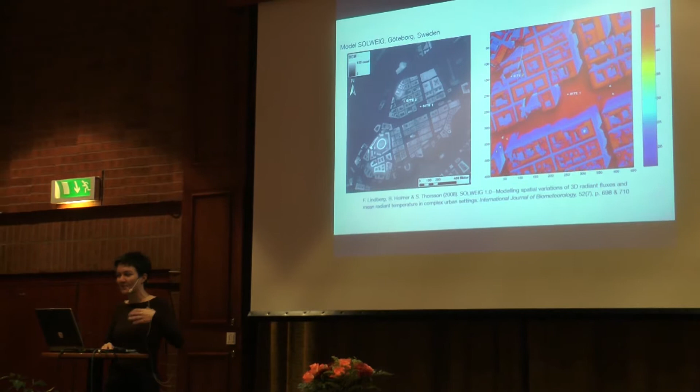So when I landed in Chicago in a similarly rather confined research environment, I felt at home, and I started to develop my dissertation topic. During the 2000s, there was a considerable amount of research coming which tried to address the issue of solar energy in a complex environment like cities. So I immediately jumped on it. This is something I want to do. So I worked on it.

There were three major universities working on it. Göteborg, which was more than just the climate aspects; Lausanne; and Cambridge, the Martin Center. So I looked at what they were doing, and I developed my own first, second, third proposal. I wanted to study how the built environment, different forms, influence the radiative environment between buildings. I presented it, and there were lots of comments and questions from my advisors.

But when it came down to whether they'd accept my proposal, it was like, 'Chilla, you are narrowing down too much on your topic. You're just concentrating on one single aspect, the radiative environment. You need to open up. There's much more to it. You need to look at the climate.' So I said, yes, of course, I will look at the climate.

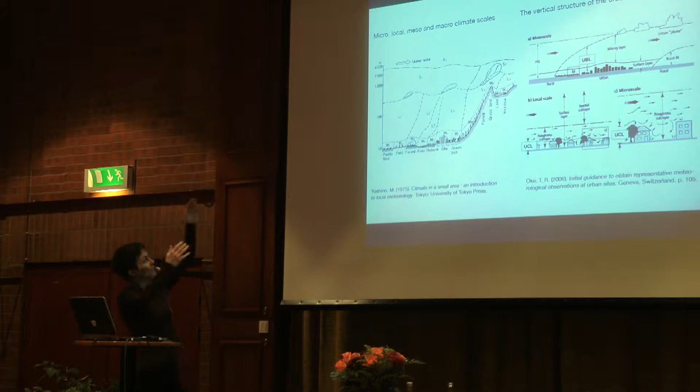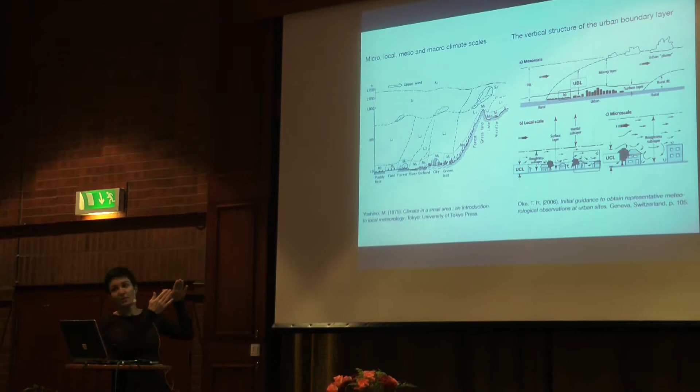When I first said yes, I didn't know what I was getting myself into, because apparently I needed to gain a basic understanding of atmospheric science and a working understanding of urban climatology. What I learned is that they divide the atmosphere into different scales, from the larger ones down to the micro and local scale, which is eventually the interest of architects, planners, and most engineers. I also learned that as you come from the larger scales toward the smaller scales, solar energy and surface conditions play even more pronounced roles in the conditions we find there.

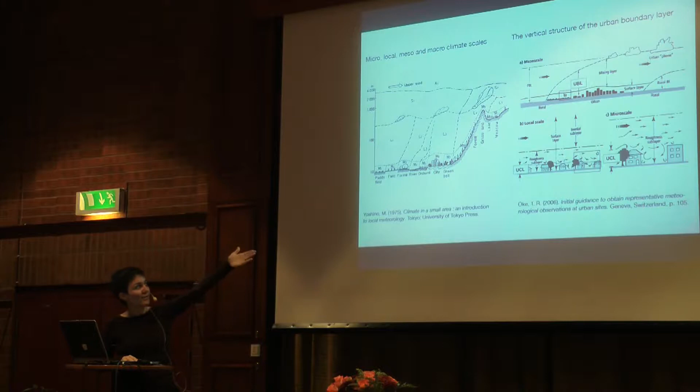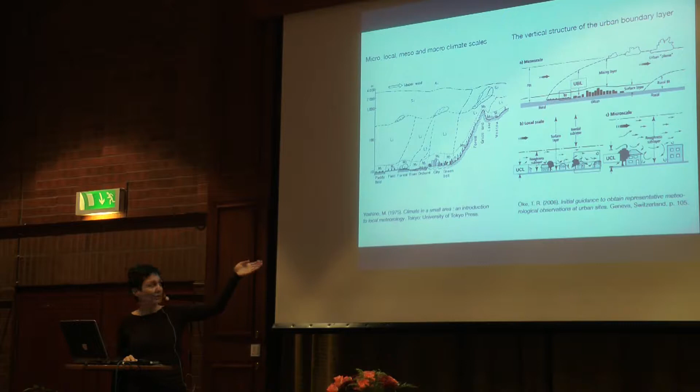So I included one part of how they are structured, but my topic dealt with the influence of urban form—in my case, urban block typologies—on the microclimate between buildings, which in climatology is termed the urban canopy layer. So then I needed to decide what measures I was going to apply.

Temperature came naturally. By digging through the literature and studying urban climatology and urban human comfort, one measure that came down to it, very important, was the mean radiant temperature, which is a theoretical measure. It's more like a concept, which unifies short and long wave radiation and its impact on the human body. So obviously that was my second choice of what I was going to be measuring.

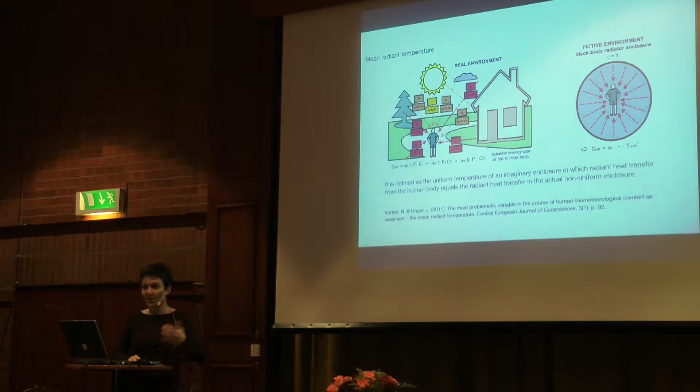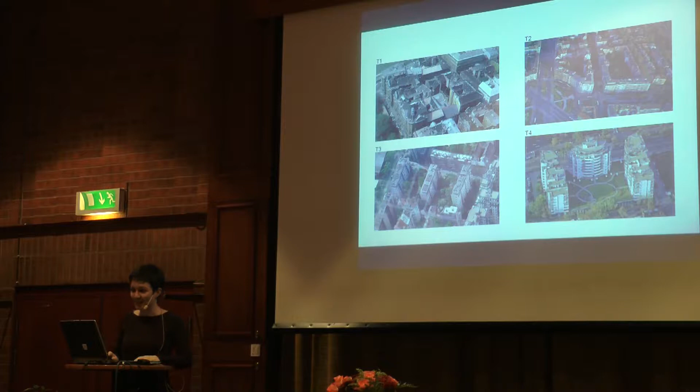And I chose my second hometown, Budapest, as a concrete form, which later could also be evaluated on site. As you might already suspect, the conclusions were, of course, that when it comes down to climate between buildings, the major component is the sun, and the form of the buildings. All other aspects I also studied just came second, so it was a bit of a circle that I ended up completing through my research.

So this is where I would like to finish, and I would like to thank all the professors and the school for this lasting experience. Thank you very much.

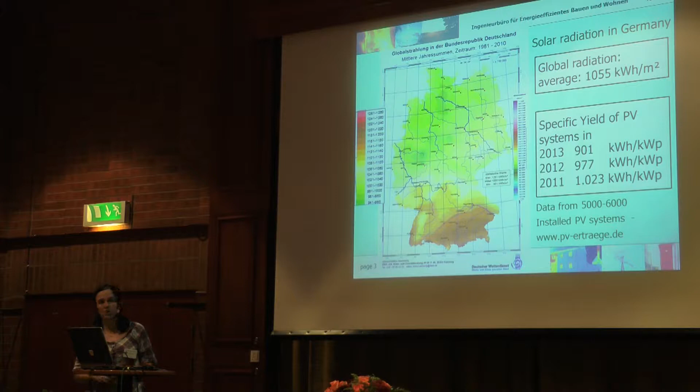I just want to talk a bit about solar energy in Germany, so you know what I'm talking about, and give you an idea of how much radiation we actually have and what the outcomes are. It's about 1,000 kilowatt hours per square meter, and depending on the weather, you get out between 900 and 1,000 kilowatt hours per kilowatt peak.

So it's not about feeding into the grid anymore, it's now something different. However, what really worked is that system prices went down quite a lot in the last years.

What we learned in our engineering office is that it's very important to really analyze the locations and actually go onto the roof to have a look. For instance, they had a solar thermal system nobody really knew about, so it would be hard to install PV systems there because something else was already in place.

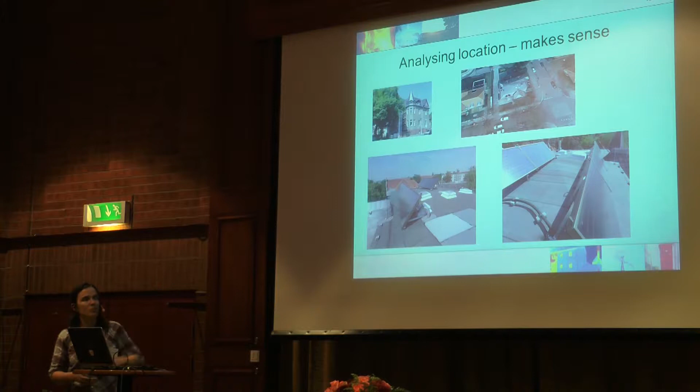It's just that users sometimes don't know what happens in their buildings. They had a solar thermal system but nobody knew about it, and they wanted a PV system although there wasn't much space. So when you have a building, you really have to look at what happens there, what is there.

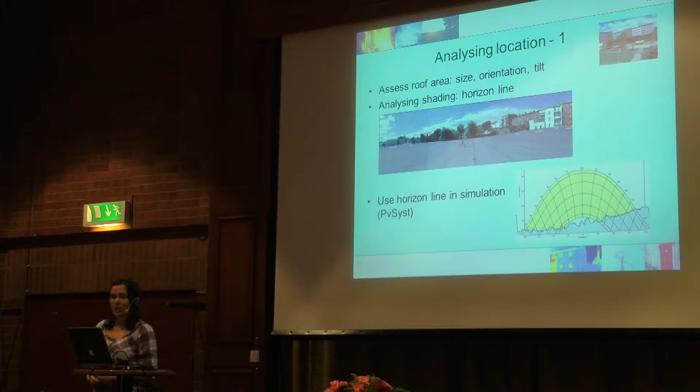What we did then, I think this was a good lesson I learned, was analyzing the location. So what we also did here in the ESES course, we had a look at the horizon. We took 360 degree photos, and then using the horizon line with PvSyst, as we also used in ESES, for analyzing how much output they would have.

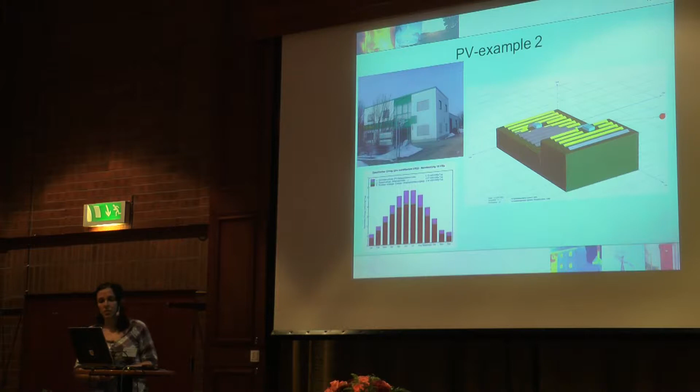What's also an issue in Germany, as here as well, is the whole shading problem. Whenever you look at PV systems, you have to analyze the whole roof area and any shading problems. Also, because of the change in feed-in tariffs, self-consumption is now much more important. It doesn't make sense to feed into the grid when you only get 12 cents, but pay 25 cents for electricity yourself. So the whole issue now goes more into storage and load management, and this is gaining importance.

What we learned is that you have to consider the entire building. It's not only about putting a PV system on the roof and that's it, but you have to know how much energy they need, and how much of the generated energy they can actually use.

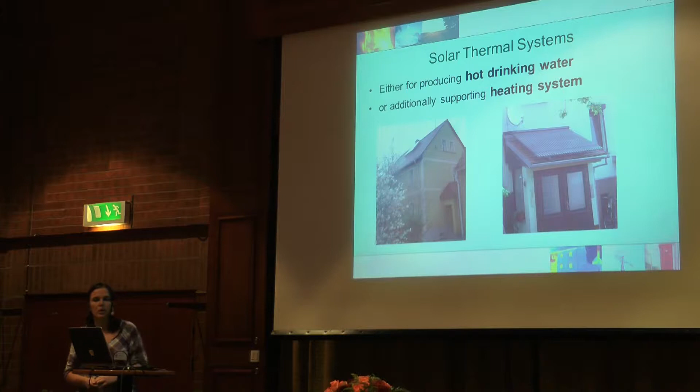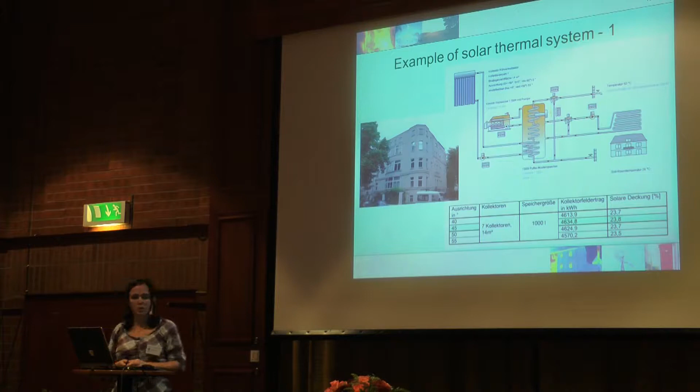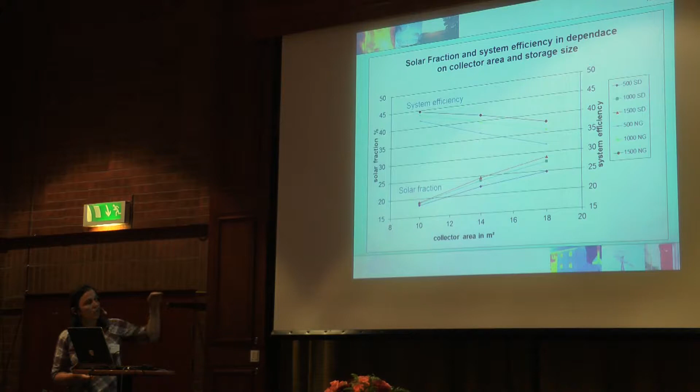Solar thermal is also used for domestic hot water, or for supporting the heating system, as we already talked about in Germany. This was also a project in Leipzig, an old house where the owner wanted to install a solar thermal system, and there we were optimizing what kind of system he could install, how big the storage has to be, and the influence of solar fraction on system efficiency, just as I also learned here in the ESES program.

Just the same, when you look at solar thermal systems in Germany, you also have to look at the entire building—how good is the insulation, what kind of heating system do they have, how many people live there, and how much hot water they actually use.

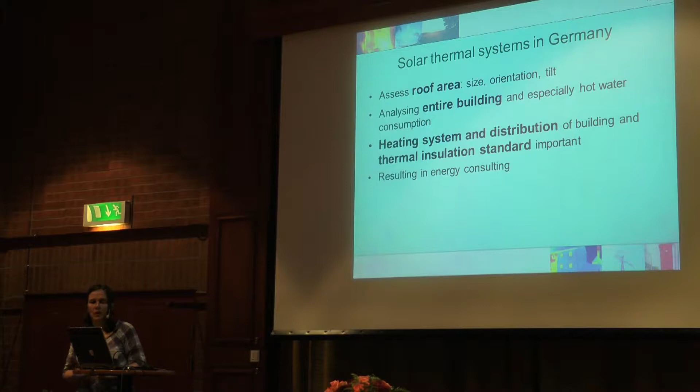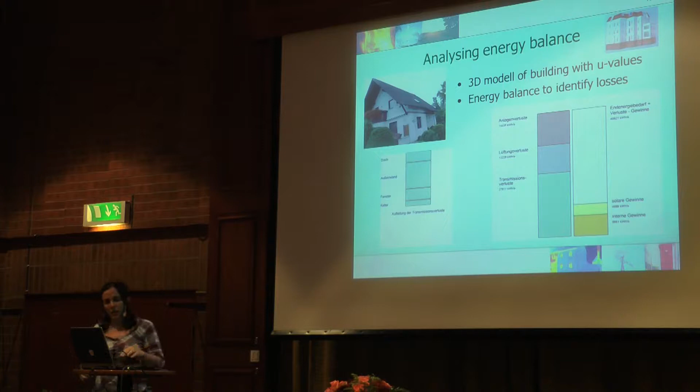That's why we came more to this whole issue of energy consulting. So now what we actually do is look at the buildings—whether it's just one person living there, or even houses with a lot of flats. What we do is first analyze how much energy they use, how much energy they lose, whether through the roof, outside walls, windows, or the cellar.

Then we give them ideas about what kind of redevelopment or renovation measures make sense—does it make sense to renew the heating system? First of all, we try to find solutions to save energy, and then we try to integrate solar systems or renewable energy systems, because that makes much more sense.

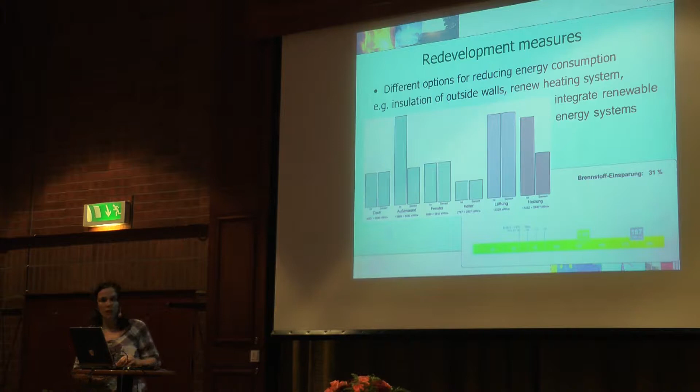But the problem is, even if you have a nice concept, it doesn't work if it just ends up on paper somewhere on a shelf. So we are more involved in quality control now, and supervise the construction, because a concept only works if it's really done the way you described.

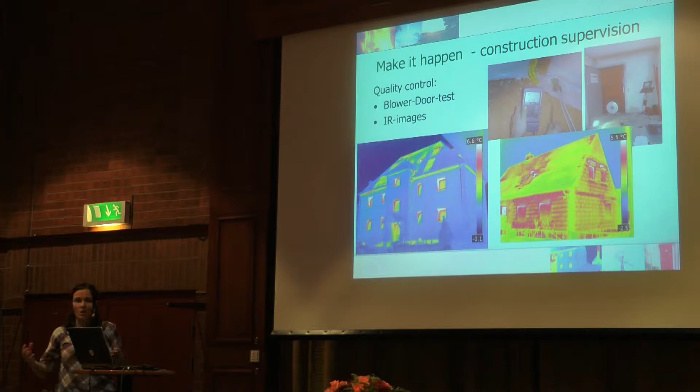Very often it happens that a plumber says, 'Oh, but I have the solar thermal package for a special price,' even though it doesn't make sense to have that kind of package. So we are also doing measurements—it's a blower door test, which you might know is about air tightness.

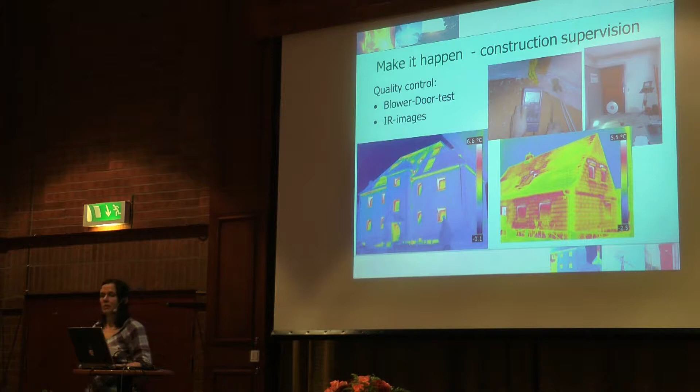These are infrared images. This is how a German house looks when it doesn't have any insulation—there are a lot of losses going on. This is how a house looks when the renovation doesn't work out correctly. As you can see on the roof, they had problems with air tightness, and mold came in, so now they have really big problems because the renovation was done the wrong way.

So we now have a much broader view of the entire buildings, looking more into building physics, ventilation, humidity, and mold problems.

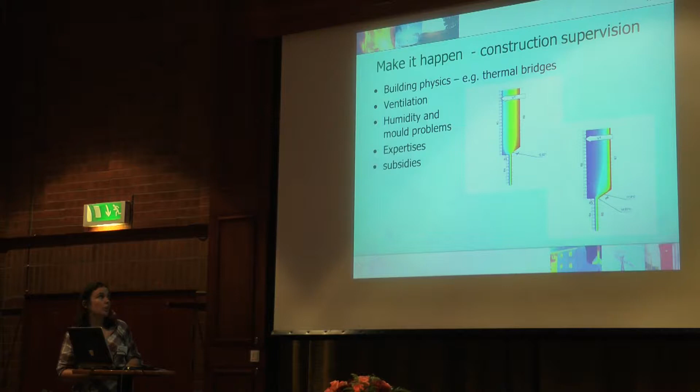We do expertises, and what's also a big issue is subsidies in Germany, because there are programs where people can get very low loans, about 1%, but they have to involve energy consulting experts. So in order to get the loans, they have to employ someone like us, and they also get back about half of the money that we actually cost. The German government tries to make sure that when renovation measures for energy efficiency are done, they are done correctly. So that's also quite good—you can even get half of the money back from the state.

So what we're actually doing now in our own engineering office is analyzing buildings, thoroughly identifying the losses, and proposing energy efficiency measures—like insulation, new heating systems, and renewable energy systems. We look at the entire building and its users, and provide custom-made solutions as an independent expert. We're not selling anything to people, but just try to convince them with our expert opinion about what makes sense to do. This you can see in one of the projects.

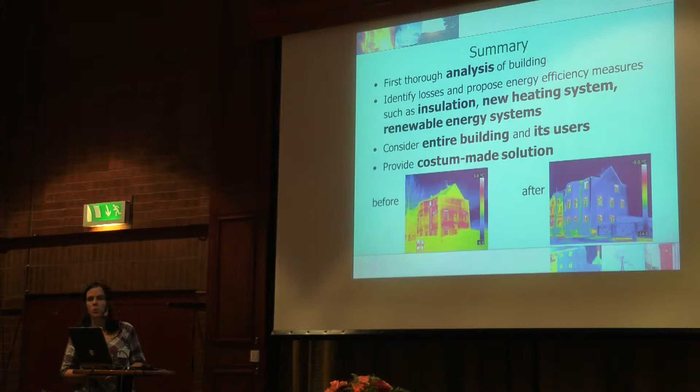This was before the renovation. They put insulation on the walls, and as you can see, the losses went quite down. That's it.

Well, sorry, one more thing. Okay.

Thank you. Okay, so that I found really interesting, because it mirrors a lot what we've been doing in our own group, starting on some kind of technology, but then going to a holistic approach of the whole building, because this is what is necessary now.

We now go on to Artemis Optikov, and he works at the company which is the most ESES dense company in the world, I would say. He's employee number 5 in the company who's gone through the ESES program. I think you're only 2 who are actually working there still. Yes. And there was another guy who came for an interview or these discussions with them a few weeks ago. So that could be number 6 coming sometime soon. So, welcome, Arthur. Thank you, Chris.

Dear all, my name is Artemis Optikov, and I studied in ESES in 2010-2011. And I'm very glad to be here today during this nice celebration of ESES and SERC University. So, during the presentation, I will talk mainly about my current work, but I want to tell a little bit about my educational background and working experience after graduation from ESES. So I studied in Ukraine in Dnipropetrovsk National University, where I got a bachelor and master degree in renewable energy engineering, and it was quite a good start point to study in ESES.

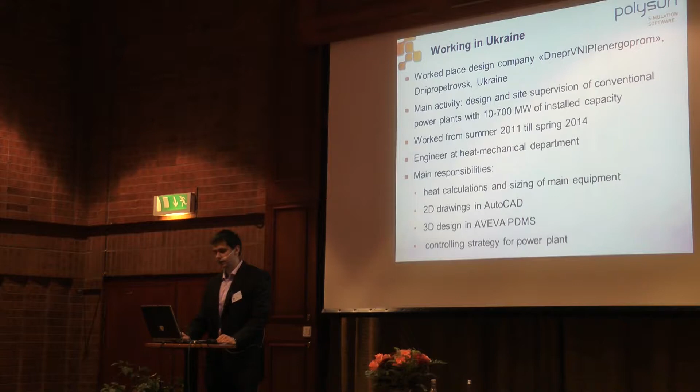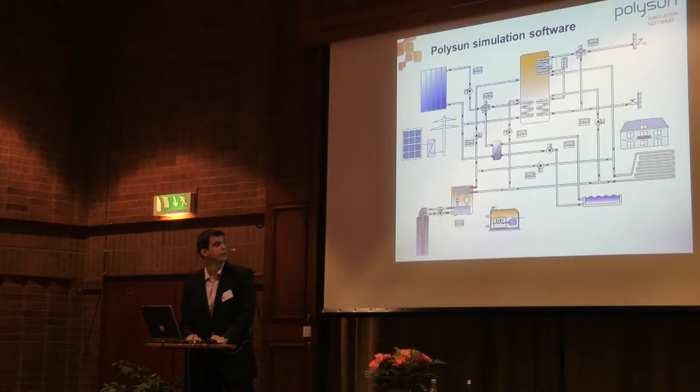I want to mention some main features and advantages of the software. So Polysun allows to simulate different components in the scope of one system. It means that both electrical and heat part can be simulated in one system. And the plug flow algorithm and variable simulation time steps allow precise simulation of systems with dynamical behavior. It's also a very user-friendly tool. It was translated into more than 10 languages, and it has a wide manufacturer database from all over the world.

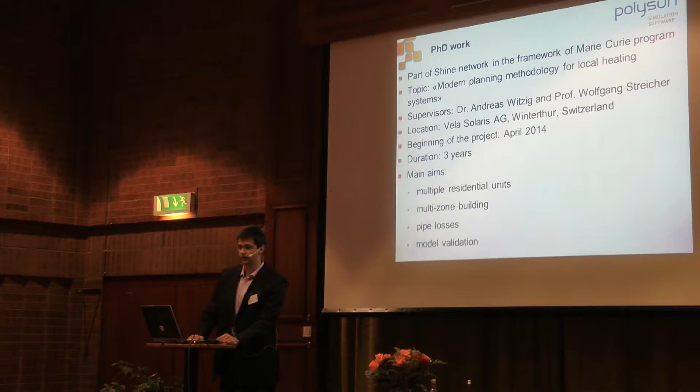I'm doing my PhD work there. My work is a part of the Shine network, which is paid by the European Union. And the main aim of my work is to extend Polysun to allow simulation of decentralized solar district heating systems. The main sub-aims are to extend the building model to cover simulation of multiple residential units in scope of one system. Also I need to develop a new model for multi-thermal zone buildings. And at the end, I want to work also with the pipe losses model.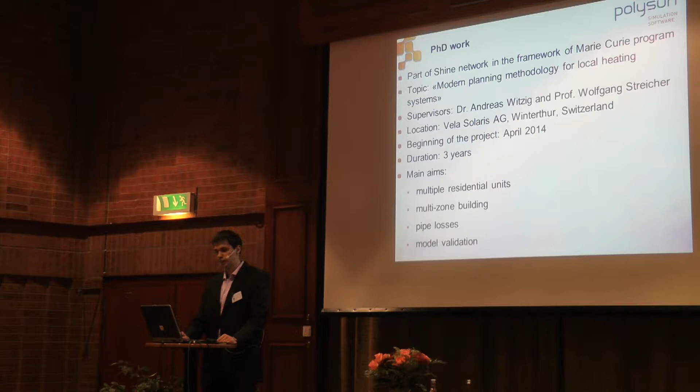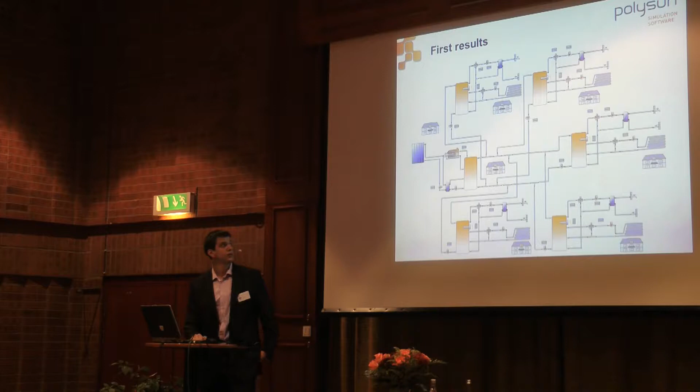My project duration is 3 years, and I've worked there for half a year already and achieved first results. So it's already possible to simulate in Polysun several buildings for the centralized heating system. You can see on the screen such a system example. So that's all about my work. And in the end, I want to congratulate SERC and ESES on this double anniversary. And I want to wish you a lot of good students and fruitful research. Thank you for your attention.

Yeah, thank you very much, Artem. So, as I said before, one of the joys of working on teaching in this program is to see people, but it's always nice if you can meet them again. So Artem is also working in the same project that I'm working in, so it's actually really nice to meet up with him again. So this is a big benefit as I see it. So next up, also from Ukraine, Hanna, please go ahead.

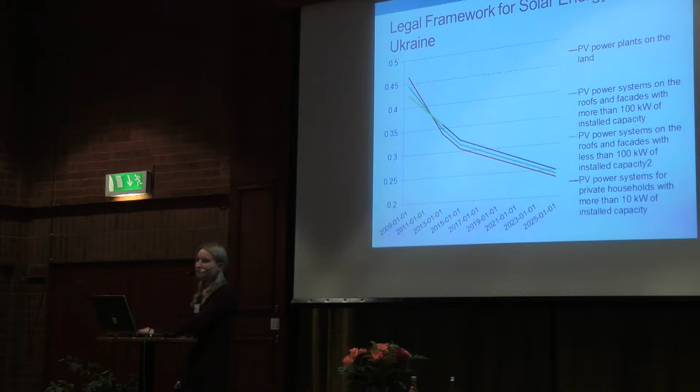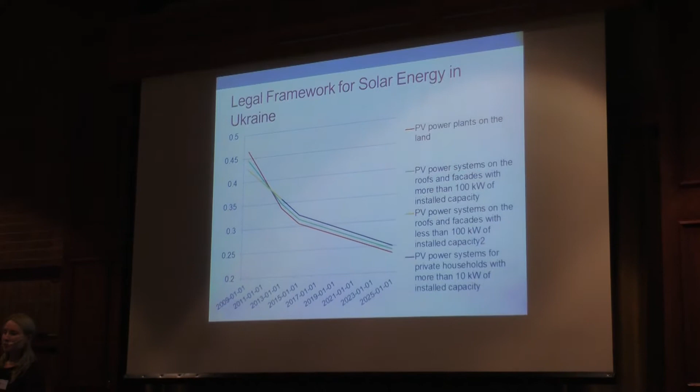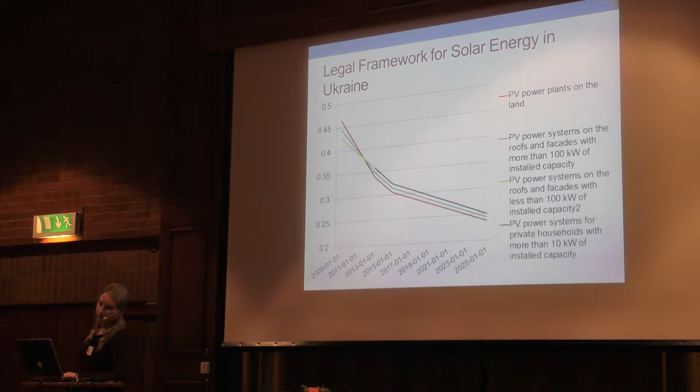So when I came back from Sweden, it was a solar boom in Ukraine because a really high feed-in tariff, which was called the green tariff in Ukraine, was introduced. It was set at 46 euro cents per kilowatt hour, and it was 10 times more than the average price of electricity for households. And this green tariff is subject to decrease over time, and it is granted until 1st January 2030. So now it's about 34 euro cents per kilowatt hour, and from January 2025 it will be 24.

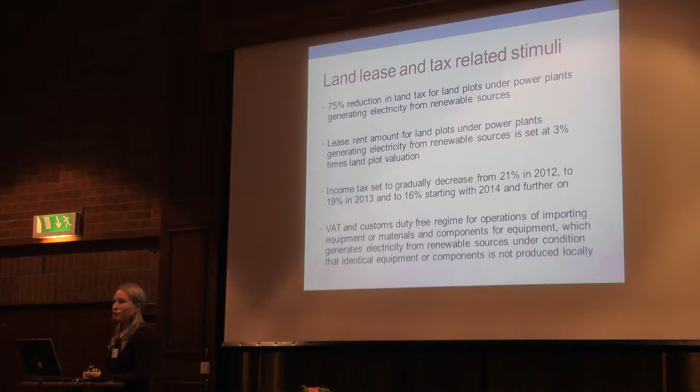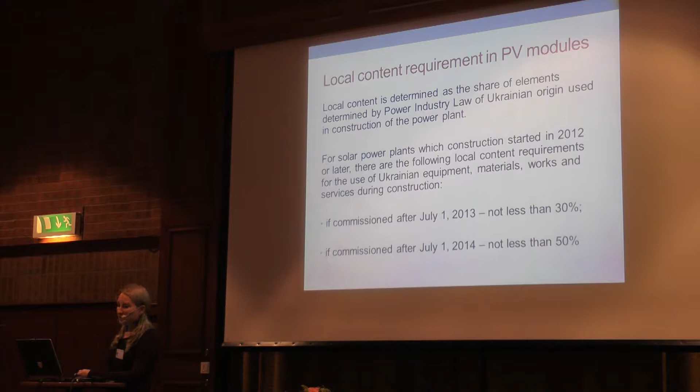So also in 2010, 2011 some land lease and tax-related stimuli were introduced, which really helped companies to build PV power plants in Ukraine. And now we have about 600 megawatts of installed PV power plants. However, in 2012, a local content requirement was introduced by the Ukrainian parliament, and the local content requirement is now 50%, which is very difficult to meet. That's why the solar energy market is not developing at the moment. It's one of the reasons.

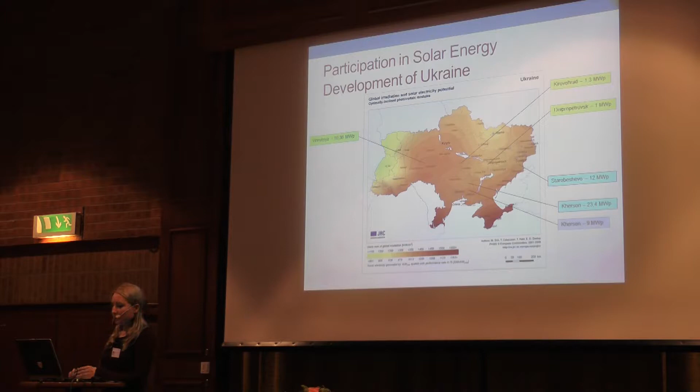So at the moment, the main goals of the energy sector of Ukraine are to introduce changes and increase efficiency, and also to decrease dependency on Russian fuels, of course, and increase energy independence and energy safety of Ukraine. And Ukraine has to encourage the transition from gas to alternative fuel types, and also increase energy efficiency and further develop the renewable energy sector of Ukraine.

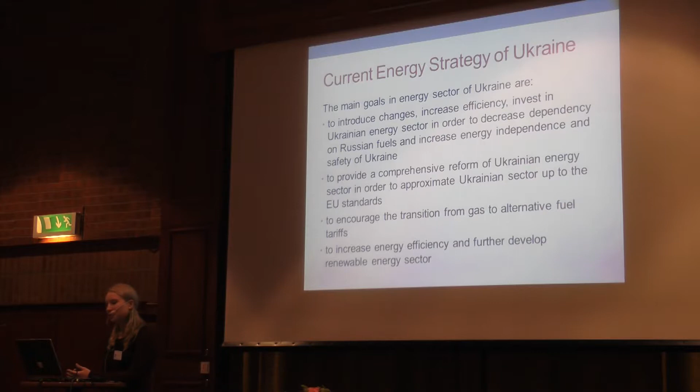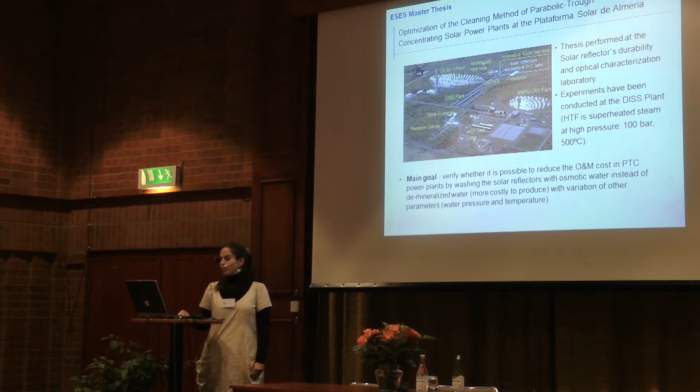I don't know if you're familiar with this, but this is Almería in the southeast of Spain. This is the Tabernas Desert, and many Western films were shot there. Clint Eastwood, love it, and everything. But apart from that, there is one famous research center there, the largest in Europe, and I performed my thesis in the laboratory of optical characterization and decay of solar reflectors. You can see the sign over there. It's a very, very large center.

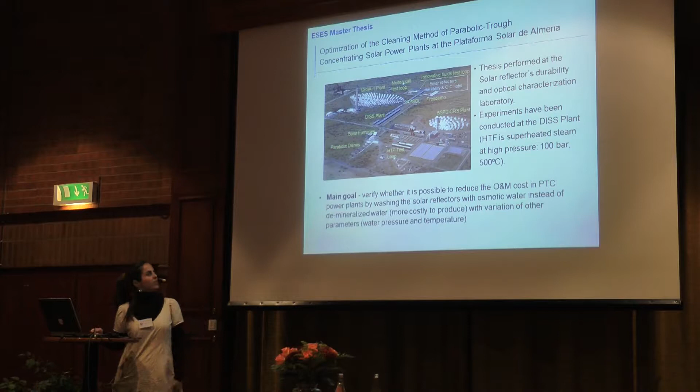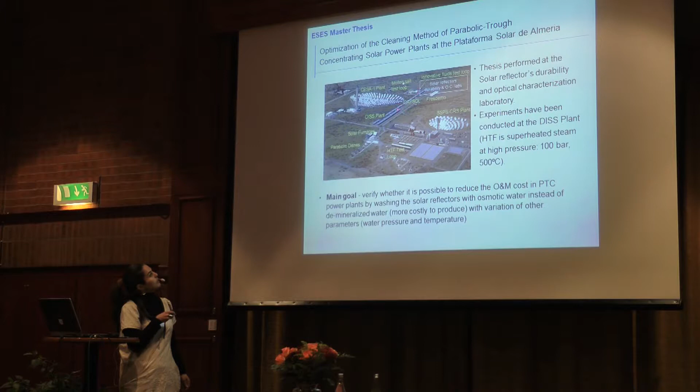So my thesis was about how to optimize the cleaning methods in order to reduce cost. Basically, normally in CSP plants the mirrors are washed with demineralized water, and we wanted to demonstrate that with lower quality water we could reach good optical performance as well. So yeah, the experiments were developed in this loop here, and yeah, here we are.

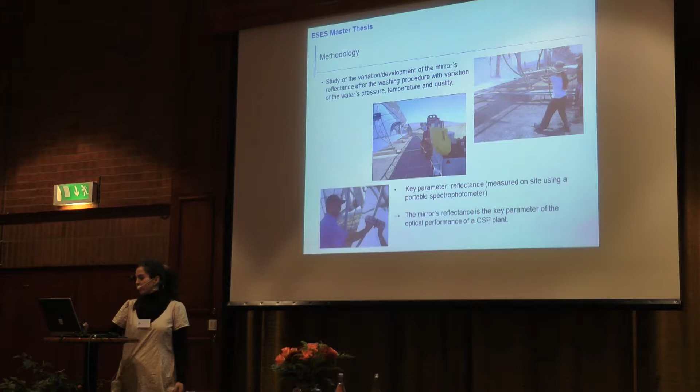We have here some pictures about the thesis, when I took the experiments, and basically it's based on how the reflectance was varying depending on the type of water, the quality of water we were washing with, in combination with other parameters like pressure or temperature. And finally, we had good results. We could reach good reflectance values, and in combination with a bit more temperature, we could reach very close values compared to washing with demineralized water, which was much more costly.

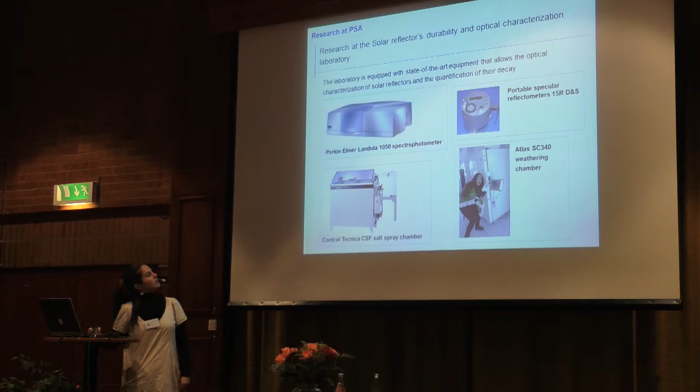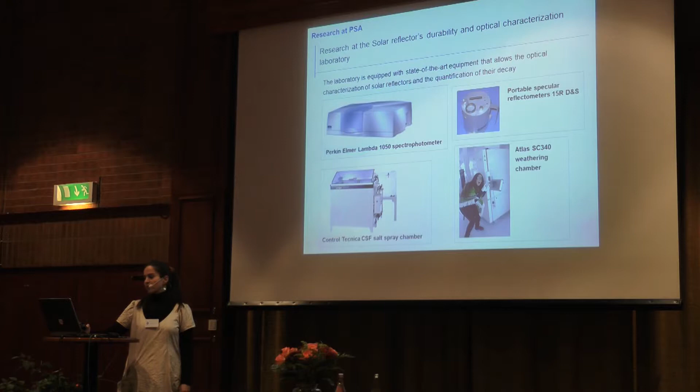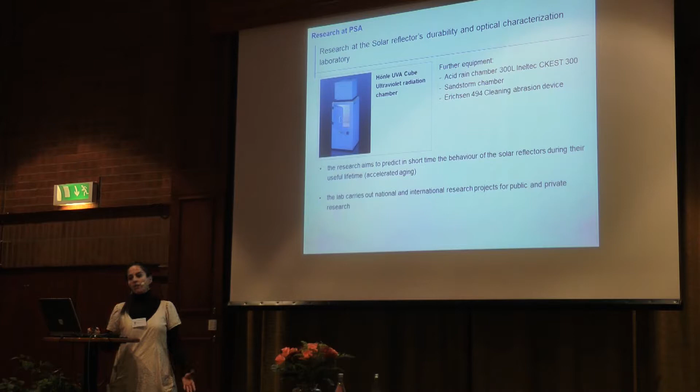After that, I got a job there, and I had a great time there, and I continue working in this laboratory. And these are a few pictures of the instruments we were using there. Spectrophotometers, portable reflectometers, so we could take measurements on site, chambers to simulate salt-sprayed atmospheres, weathering chambers to simulate several weathering conditions that would destroy the mirrors. And the main activity of the laboratory is to study how the mirrors decay during weathering conditions, and how will be the real lifetime.

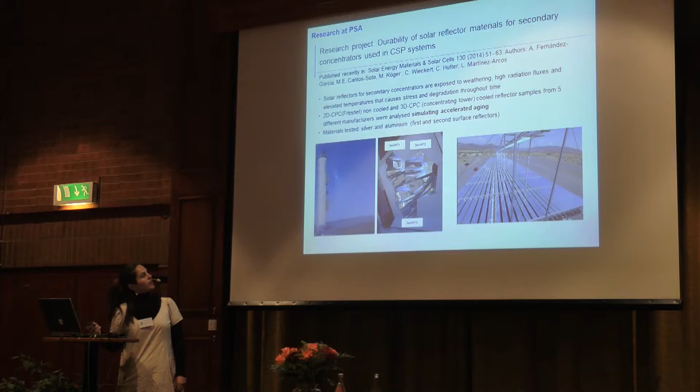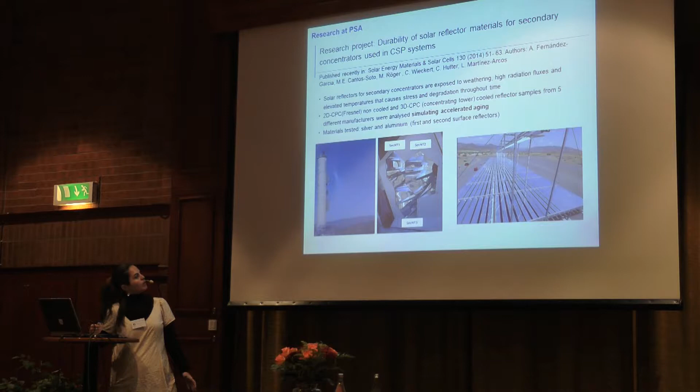Recently we launched a publication. It's not really fresh for me, but by that time, that was 2 years ago, we did a study with secondary concentrators for Fresnel and for concentrating towers. And we took samples, and we performed several tests in laboratory, and there are a few tests here. We put them in salt spray chambers.

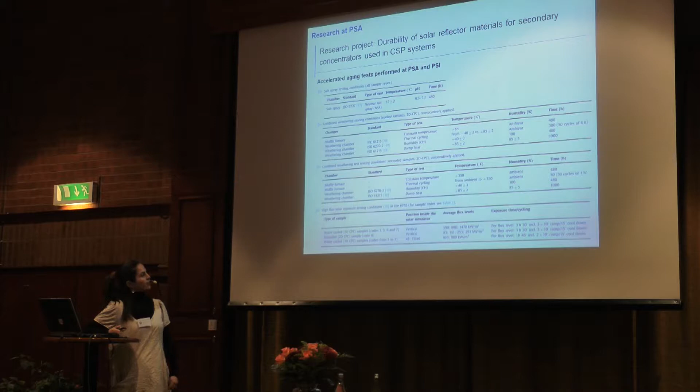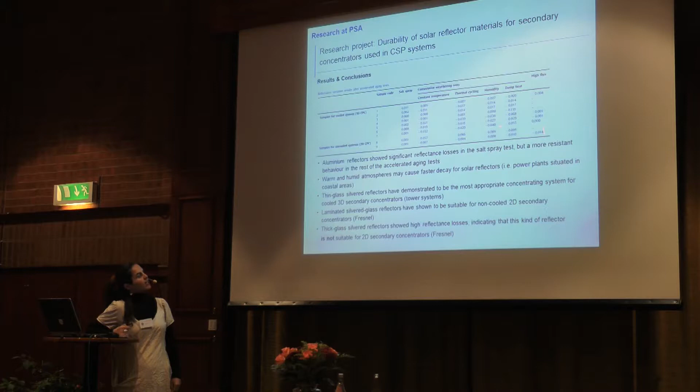We had also a muffle furnace, so we could put them at constant temperature, and thermal cyclings to simulate day and night, and how the mirrors would get decayed depending on this change of temperatures. And we performed also some experiments in a solar simulator in Paul Scherrer Institute in Switzerland, and then we compared several materials. And we obtained some results, maybe it's too long to explain, but the conclusion is that with damp heat simulation, we got the highest reflectance losses, basically.

And after this period in Plataforma Solar de Almería, I left Spain and I went to Iceland to work in an eco-village. Because since I was here in Sweden, I love northern countries. And I work in a sustainable community, very peculiar, where there are about 100 inhabitants, and 50% of them are disabled people who work and live there. The philosophy is based on reverse integration, which is the society adapts to the people with special needs instead of the other way around. It's a small village that incorporates greenhouses, organic bakery, coffee shops, art workshops, so people can live and work there. Each inhabitant is working in one of these institutions of Sólheimar.

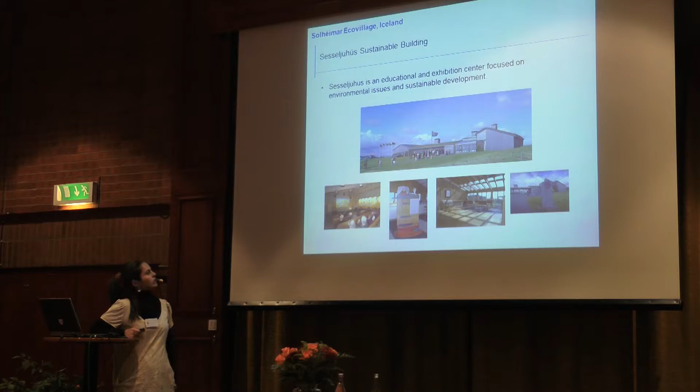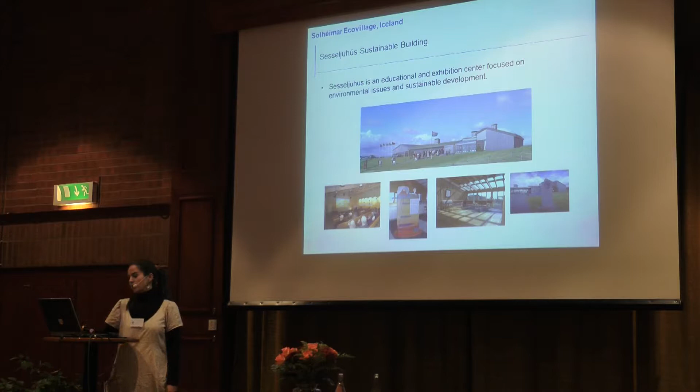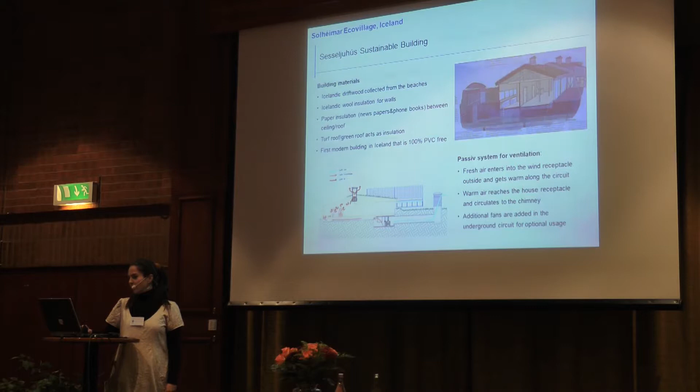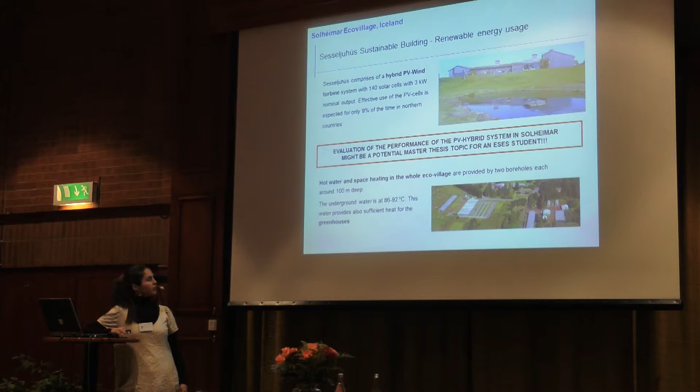And the last year I was working in the greenhouses, which means this summer, because there are 2 wells in Sólheimar which provide hot water and district heating for the entire village, just 100 meters deep, and we get water at 86 and 92 degrees, and this is enough to supply hot water to create high temperatures in the greenhouses.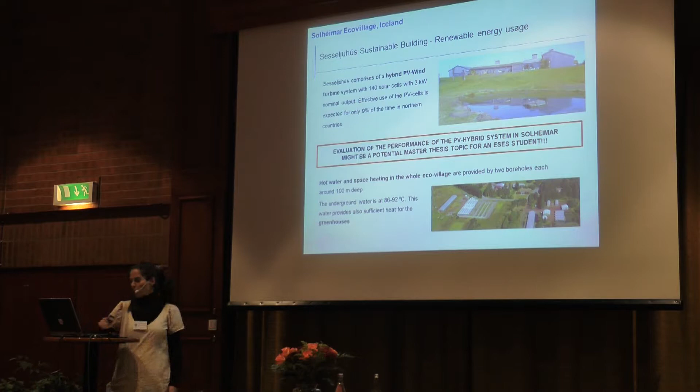What I did last year is that I designed a project to dry tomatoes. It was fantastic because nobody was drying anything there, and they had energy and they were not using it for drying food and storing food. So this is Reine Pétur again showing a tomato, fantastic. And this is the first prototype, the first design I did for the GO-DRY project. It was kind of optimized, and this is reality.

So that was the result, but at least we could build something, a chamber, and last year was the first experimental drying there, and this year we could improve the chamber a bit more, and we could reach temperatures enough to dry tomatoes, because tomatoes need between 48 and 50 degrees to get dry.

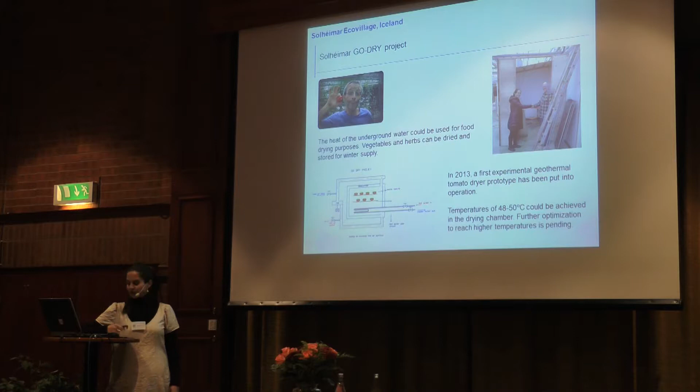And I just wanted to show a couple of pictures of Iceland in case one of these students is interested in going to work and develop a thesis there.

And I wanted to say thank you to all of you guys. Thank you to SERC and all the staff. I had a great year, a great time here. Thanks to Ghassan, as one of the students, he was feeding me the whole year, making dinner for me. And that was great, so I could study and I got better results than him, but yeah. And thanks again, it's nice to be here.

Yeah, thanks a lot, Maria. So, next up is Ioana, who's coming in to speak about what she's been doing. No. I don't know. I'm the last one. I didn't see it.

Okay. Hello, everyone. My name is Ioana. I come from Romania. I was in the ESES batch that graduated in 2011. I started in 2010. So you've seen some of my former classmates here, Anna and Artem, and Bonnie is also here. So, I will give a short presentation about what I've been doing since 2011.

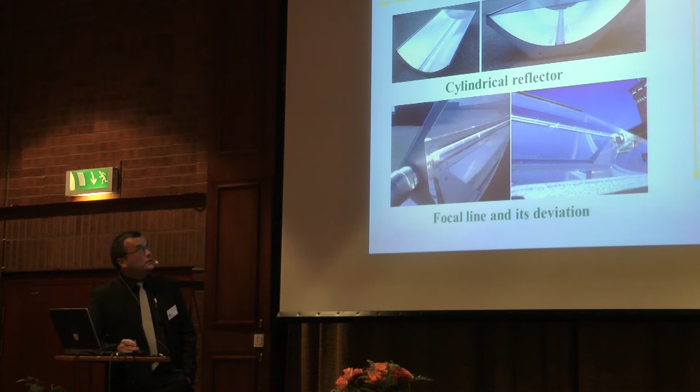They tried to make some kind of evaluation using a manual shadow device or manual laser application. The idea which I proposed was developing an automatic system which could provide testing of the device in a totally automated mode, excluding any manual or human impact. I replaced solar beams with laser beams, and based on this idea, during 4 months, from the first idea up to installation at the plant in Sollefteå, over 4 months of pure work, I could develop it.

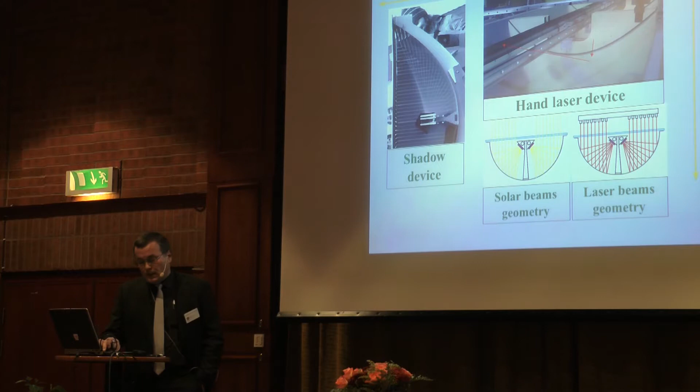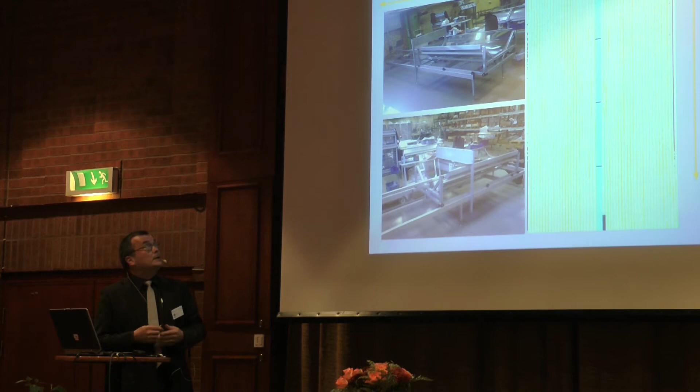This is more related to my previous experience because I worked with lasers and systems. During my previous life, I learned a lot of additional fields. Basically I'm in electronics, but I also worked with mechanics, plastic production, and software, and based on this I developed a system which works like that.

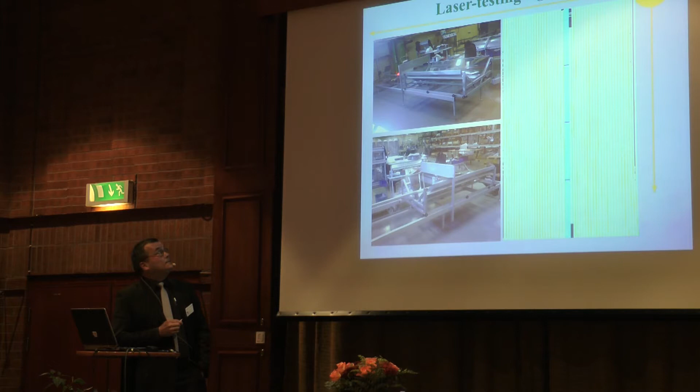You can install this trough, and it automatically moves under a line of lasers. One receiver comes inside with about 5 photo receivers on each side, on the same place where the common receivers stay, and collects data about reflection. Finally, we get this image. Each cell is one cell with laser reflection, and we can evaluate the quality: if it's black, there is no reflection; if it's red, it's on the edge; if it's green, it's fine.

It comes, but it's not like PV, only for thermal yield. There's another type of reflection that comes in at specific places. We also have system software that produces an Excel file, which works for calculating the percentage of how it works.

The system, as I said, is totally automated. It goes to the end and back. You can remove and store in a database the data of all troughs that pass this testing.

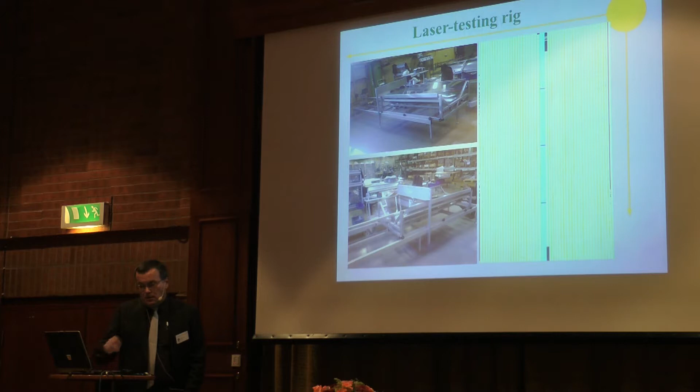It was really hard work, but I liked it. Developing something new, reaching goals which nobody believed were possible in reality. Even in that company, they never believed I would be able to finish this project to the end. Moreover, I developed two systems there.

This first one, and this second one, was for my second master's thesis program in electrical engineering. It was a very hard job, but it was really interesting work, and I did everything myself. You can see that: assembling, cutting, electronics, laser application.

I had a lot of contact with Mid Sweden University, and they supported this project also. I still use this contact now, because I have an additional project involving laser application with that company, and with the Mid Sweden University also.

Exactly 5 years ago, I found a job at the company SenseAir, which is located in Delsbo, close to Hudiksvall. The company is a world-leading manufacturer of non-dispersive IR gas sensors. It's like expressed intelligence in a small device.

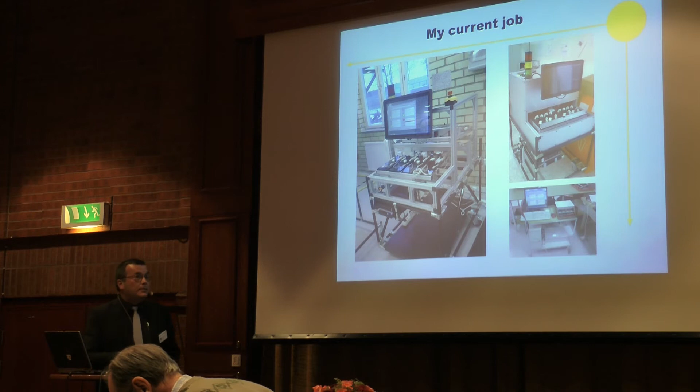The sensor itself is not a complicated device, but most of the research and knowledge is expressed in the system of calibration of each sensor. I can say all equipment we use in our production was developed by internal resource, because it's extremely specific requirements. We cannot find similar equipment anywhere, so we must develop it ourselves. My responsibility at the company is developing automatic systems for measurement, production, and experiments and research.

These are a few examples of the so-called final test system. Sensors present themselves as high quality, low cost suppliers, and we must test all our sensors at the final stage. This is a totally automatic station that provides testing. It's a combination of pneumatic and different gas connections, electronics, and a visual application which can recognize the absence of any elements, for entire testing of sensors, because different types of sensors require different conditions for testing.

This is my job, which I designed and developed, not all of them but some of them. And actually, I like this job. I like the place that I live. The definition of a happy man, as I know it, is that a person is happy who every day goes to his job with joy, and every evening comes back home with joy. I think I am that person.

It's the end. My current job is not directly related to the solar industry, but I try to maintain contact with ESES and SERC. Three years ago I started giving lectures about LabVIEW applications for the solar industry, and last year it was a course for measurements. Now we're discussing this course for this year's intake also. Probably we'll have more connection for some research in the future. We discussed with Chris also.

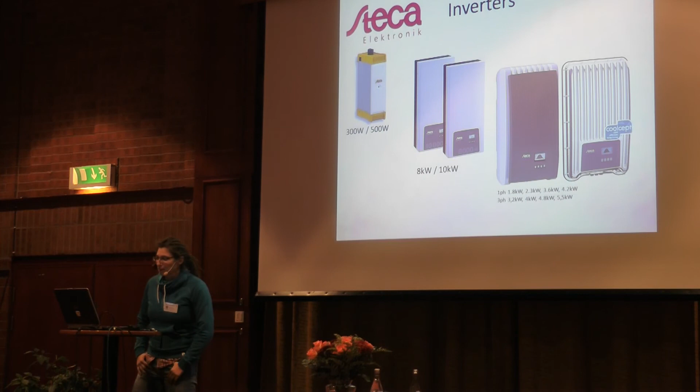When I started at Steca, I applied - they were asking for software engineers and hardware engineers, and in the hardware engineer requirement it was written minimum 2 years of knowledge in that field. So I applied for software, and I got this small inverter, 300 and 500 watts, to improve on the software side. It was an old invention from another company - now I can say it was Philips that were working on that, and they took it over.

When I came here now, it's really sad. This inverter's age is now over. It's been more than 10 years in the market, and after a certain time you get problems with the components, so they let it die out. Okay, that was my first product for the inverters.

And then the 10K - mostly we gave our products other names than the ones on the catalog afterwards - so that was the 10K. There I took part in development of some boards, and this was actually my first new product, working with this bunch of really nice new colleagues. So there are 3 PCBs of me inside, and you can always see a part of yourself in such things.

It was really interesting when I came here to Borlänge to work in SERC, and I got the chance to go to Glava. And all of a sudden, you find your own products where a part of you is in the real field. At your desk you sit and think about things, but you never see it afterwards in real life - you just see the mass production on the ground floor, but never how it's installed. So there it was the first time I saw something from me actually working, and it was really amazing.

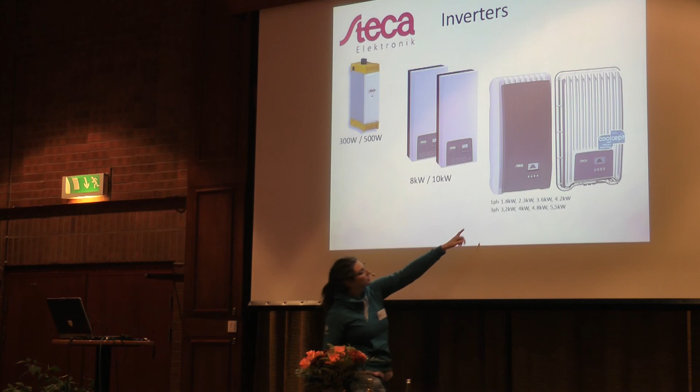After a while, customers wanted something with IP65, so that's the one on the side. That one moved forward, and after that they started to work on a 3-phase inverter, because all of those were just single phase. That's a single phase, that's a 3-phase, and out of that came another 3-phase inverter.

Up to that time I was just working with inverters, and I really loved working on the PV hybrid system, and I got the chance to work on the charge controllers - which is actually the reason I wanted to start with PV project development. Before I was doing software and hardware, and all of a sudden they said, okay, we need a project leader - that product is burning and we need you to run it as quick as possible, in 1 year. Okay, why not, let's have a try.

I did not know what that would be for me. We worked really hard for 1 year to get this new charge controller, which was taking over from the old Tarom, which was used as well in the ESES program for a while. And I think the last project I was working on - it will come out in Q4, mostly Q4 means December - is a camping charge controller with 2 batteries.